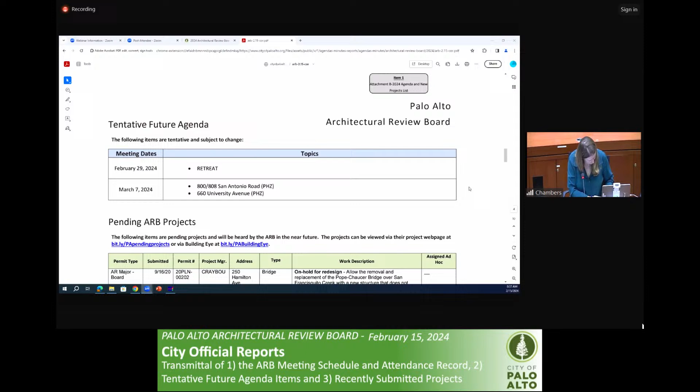Okay, moving on to the next item, city official reports. Staff: just a couple upcoming items. Board Member Rosenberg will be absent on 3/7, and Chair Baltay will be absent on 3/21. And so if you do plan to be absent, please let me know, we want to make sure we have a quorum for these upcoming items.

As you guys know, we have an upcoming retreat on February 29th. We are planning to start at 9 a.m. that day and expecting it to go until about 1 o'clock. We have a number of items planned as part of that retreat, including some trainings from our attorney's office and a few other items. We will bring in lunch that day for you guys. The meeting will be in the community meeting room, the glass room on the ground floor of City Hall.

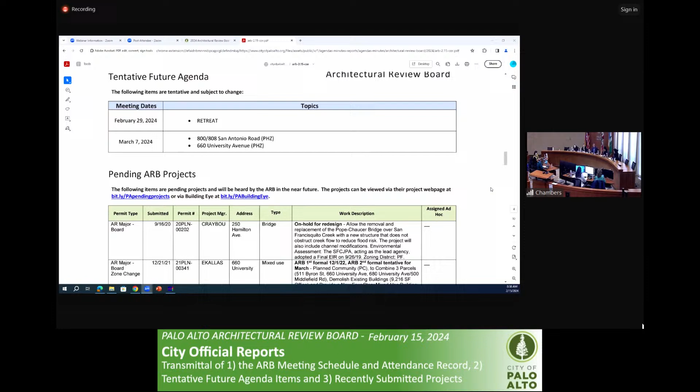And upcoming items for March 7th: we have two tentative housing projects, but it's possible one of those will move out to the 3/21. That's why I'm thinking it would be a good time for the ad hoc to report out instead of one of those projects, if we can. And then there are new projects that were filed. Let's see.

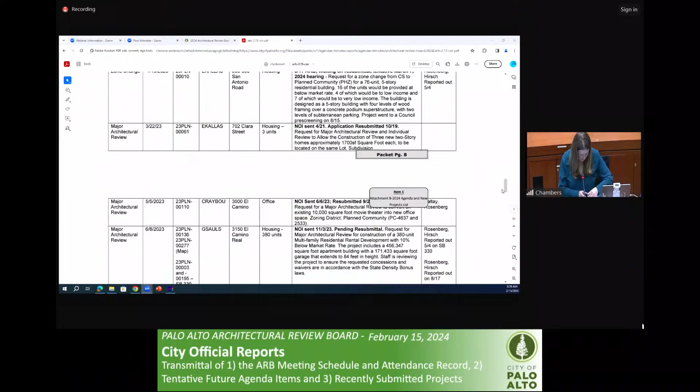Apologies to interject here, Claire. I just got notification that I will not be missing the 3-7, so I will be here for that one. Great, okay, perfect, thank you.

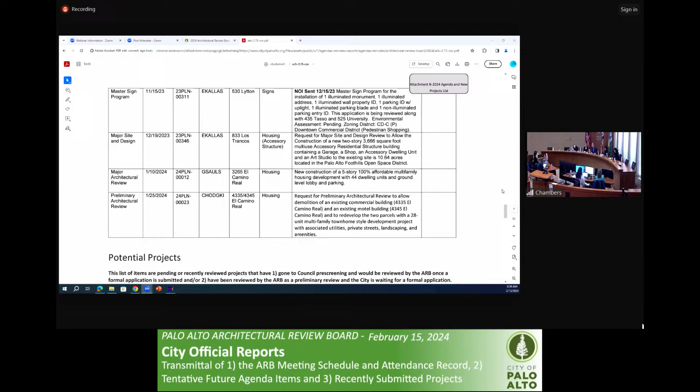Apologies, speed of light. So we do have one new preliminary review item. This is a new townhome development project at 4335 and 4345 El Camino Real, basically right on the border of Mountain View and El Camino Real. They're proposing to redevelop the two parcels with a 28-unit multifamily townhome style. This is a Summerhill Homes project.

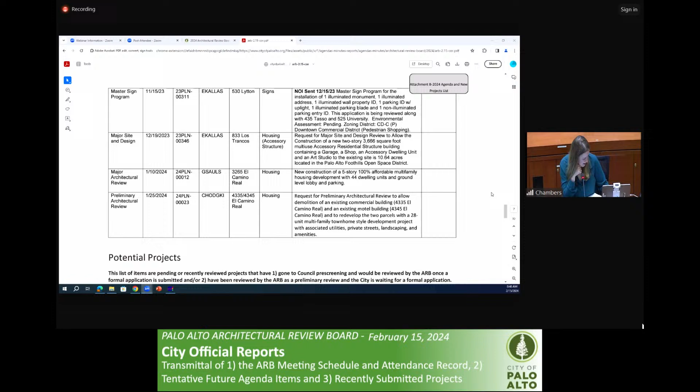I think that's the only new project. We are expecting, I just want to give you a heads up, Buena Vista Mobile Home is going to be coming in this week, filing a formal application, so you'll expect to see that on the next agenda. We are planning on taking that to an early hearing with council to get some early preliminary feedback, because there are components that will bring that project forward to council, including a regulatory agreement and other aspects of the project.

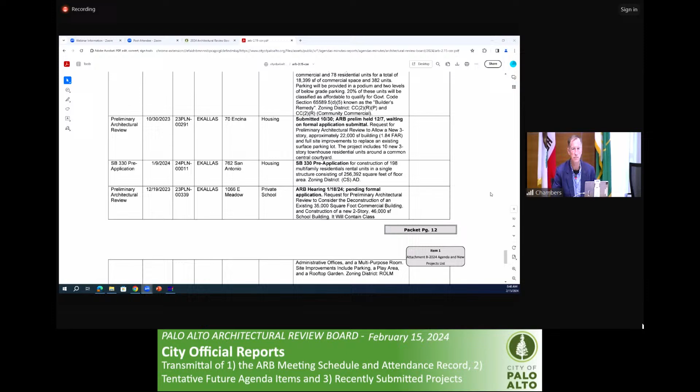I've read about it in the paper, but could you tell us what the scope of the project is, roughly speaking? I know it's not been formally submitted, but informally, they plan to split the lot. They will have a 44-unit mobile home project that gets processed through HCD, and there will be a 61-unit apartment project that's 100% affordable that will be processed through the city. So a total of 105 units.

How many mobile homes are there now? Do you know? I'm sorry to ask you these questions, but I believe, just trying to understand the intensity of this. I believe it's around 80 or so right now.

Okay, good. So I will want to assign an ad hoc committee to that. I guess when it comes in, we'll do that, so maybe at the next meeting. And I would like to assign an ad hoc committee to this project on El Camino Real.

Seems like it's 28 units of new housing, so I'd like to get two of us again, just tracking that project. Before we do that, I'd like to report to the board that I assigned, refresh my memory Claire, board member Rosenberg to the ad hoc committee for the school at 1066 East Meadow. And board member Adcock as well, I believe. I haven't had a chance to ask formally, but, that's embarrassing, we'd like to ask if you could be on the ad hoc committee for the 1066 East Meadow project. Okay, yes, count me in.

Thank you. We did have a discussion that week. This came in as a preliminary review, and they don't have a formal project on file yet. So the ad hoc committee would be available to meet with staff and the applicant if they want to bounce some ideas on the redesign off of us, and to give some early feedback. We'll make sure that we track everything that is being said so that it can be disclosed in that first hearing, presuming they come back with a formal application.

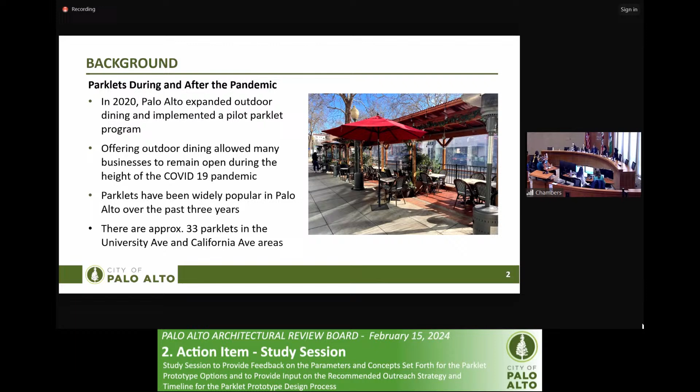As many of us know, the city expanded outdoor dining opportunities in 2020 in response to the COVID-19 pandemic and implemented a pilot parklet program in the University Avenue downtown and California Avenue Business District. The program allowed many businesses to remain open throughout that time and has been widely popular by both businesses and residents.

At this time, there are approximately 33 parklets. Actually, I have an updated number following a site visit recently. There's about 27 parklets currently constructed in Palo Alto.

As I mentioned, 2020 was the start of the program. In 2021, council directed staff to develop a permanent parklet program with input from the Architectural Review Board. And a quick note on terminology: the permanent program, the word 'permanent' is really used to distinguish between the pilot program standards and the permanent program standards, but parklets themselves are not necessarily permanent, and they're intended to be designed to be removed if needed.

Throughout 2021 and 2023, staff worked with the ARB and returned to council numerous times to receive direction on program elements, including fire safety, the use of heaters, parklet size, and letters of consent. As Ashwini mentioned, on September 11th in 2023, council adopted the permanent program standards and fees and directed staff to work with the ARB to create pre-approved parklet designs. The full history of the parklet program is available in attachment B if needed.

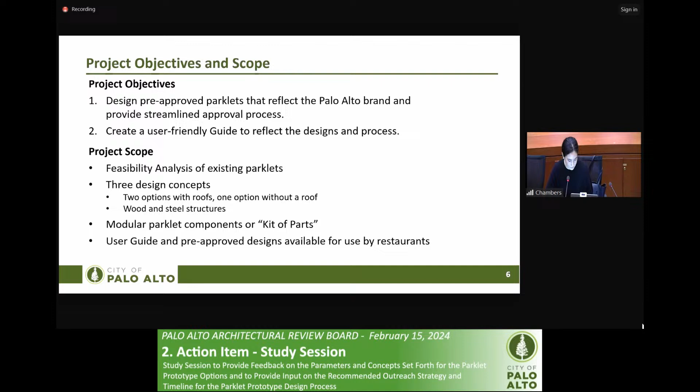Each prototype concept will include a kit of parts, including modular designs for each component: a platform, the flooring, the enclosure, sidewalls, and the posts and roof. There may be some repetition in components across the 3 concepts, but the concepts emphasize that there are multiple roof options and a no-roof option.

Upon initial discussions with the consultant architects and engineers, the recommendation is for the platform to only be available in a light gauge steel option, for wear and tear and durability, to allow these to sustain multiple years in weather.

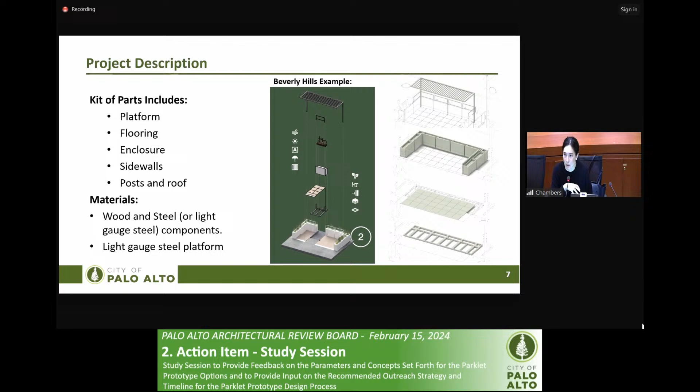The guide itself—actually, let me go back a minute. In council's direction in September, the Beverly Hills parklet example was mentioned, and that's the inspiration for this project. On this page, you can see some excerpts from their design guide showing the modular concept and their kit of parts designed and compiled together.

In the next slide, there's an example from the Beverly Hills guide showing what a page might look like in the user guide itself, outlining the component: a description of the section, a diagram of what the parklet might look like with that component, the required standards, optional standards, and the kit of parts. The part at the bottom shows the variation of designs for a planter in the Beverly Hills example.

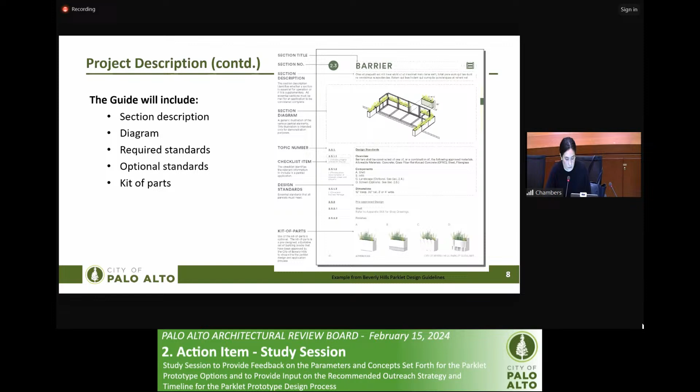There are a number of stakeholders for this project, including the Architectural Review Board, property owners, business owners, the Palo Alto community, restaurateurs, and city council.

Throughout the process and the development of the prototypes, we plan to seek input from the ARB and business stakeholders. This slide highlights the outreach timeline—I'm going to jump ahead to the next slide, which has the overall timeline, including the outreach timeline.

The timeline starts today with receiving initial feedback and ideas on the parklet concepts from members of the ARB, followed by an ARB ad hoc meeting, should you choose to create one, to review draft parklet components, designs, and materials, followed by a meeting with businesses and stakeholders in the community to receive feedback on those draft concepts. In May, we plan to return to the ARB with draft prototypes and the draft guide to receive a final round of feedback before finalizing the prototypes and guide and returning to council in June.

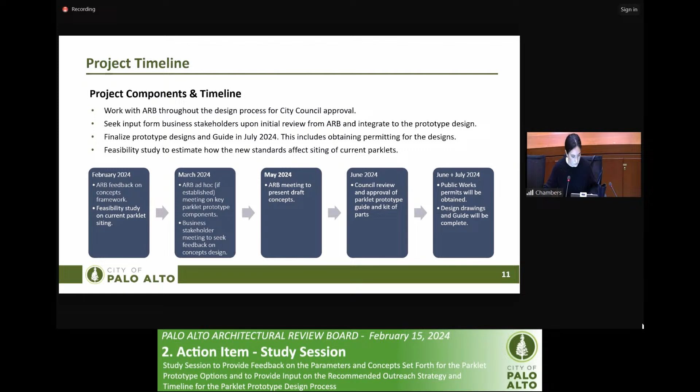As mentioned, there were numerous changes between the permanent program and the pilot program, including standards, changes to setbacks, drainage requirements, the enclosure, and size of parklets. As a result, it's expected that nearly all existing parklets will require some level of modification to comply with the permanent standards.

As part of the kickoff of this project, we have conducted a feasibility study on the current parklet siting to estimate how many parklets, if any, would not be feasible based on the new setback standards. That will help inform whether the city needs to revisit any standards.

Some other considerations as we embark on this project are heaters. Propane heaters are permitted under the permanent program with a hazmat permit, and the requirements of the hazmat permit may ultimately decide if a restaurant can use them.

Requirements for a hazmat permit include that heaters cannot be used under roofs, canopies, or tents. They must be a minimum of 5 feet away from any flammable materials, and cannot be stored indoors or in the public right of way. The standards are fleshed out further in Table 1 of the staff report.

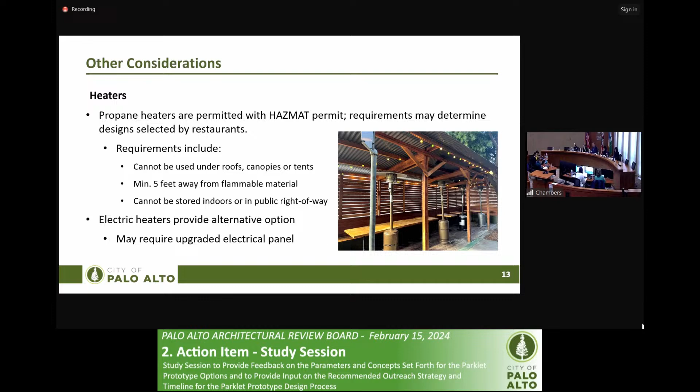Here are some questions we're seeking your input on. First, feedback on the overall proposed approach or anything you'd like us to take into consideration. Are there any materials or examples you'd like us to look at specifically? This relates to all of the components—the enclosure, flooring, roof, structure, and sidewalls. Also, do you have any feedback on the stakeholder outreach, the universe of stakeholders, as well as the strategy and timeline? We look forward to your feedback, and if we could get direction on a potential ad hoc, that would be great.

Anyway, I really urge your attention and consideration of creating a real sense of place in this very special location. Again, lighting, colors, materials. It's not just another location on Middlefield Road or even on University Avenue. It's a very special place, and let's make it special. Let's take advantage of the resources and possibilities that exist.

It may be that you want to send it to the HRB for consideration, but I think you all are capable of coming up with some really sensitive design criteria for that very special place. Thank you so much for listening.

Thank you very much. Anyone else, please? No, just the one. Thank you. We'll bring it back to the board then. We were going to go through a round of questions.

Board Member Rosenberg, go ahead. Thank you, and I appreciate your presentation—that was extremely informative. A couple of questions, I guess, about the process. So in comparison to the Beverly Hills outline you guys had shown as an example, how far along are you with preparing that document? What stage are you at?

We're at the very beginning. Okay, not a problem. I just wanted to see if there was actual documentation that you had for us to review, or if we're really just getting into the start of it. We're just getting started, and we wanted to get your feedback to help us kick things off.

Excellent. And then my second question is about the people who already have parklets—the ones hit hard during COVID, who had to clamber these things together at the last minute. A lot of people have put a lot of time, attention, effort, and money into these. So the question would be, is there going to be a separate path? You touched on it lightly about how to make sure the existing parklets, some up to 4 years old now, can be brought into compliance.

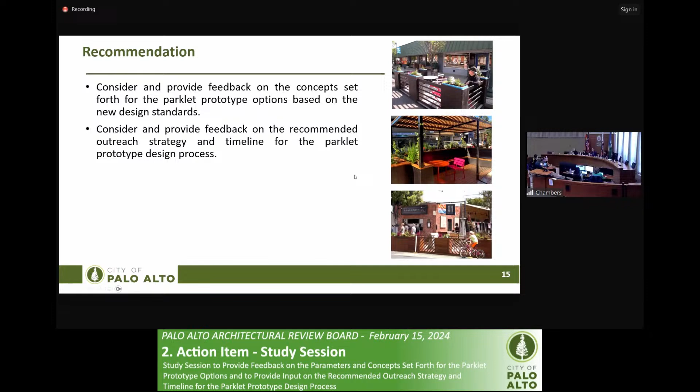Just wondering if we're going to be establishing an ad hoc committee with it? Yes, I think we will. I just want to—okay, so...

Well, we haven't discussed an outreach strategy—is that something you want our input on? We thought it's pretty comprehensive; what we want to make sure is we stay connected with all of the restaurateurs, business owners, property owners. We actually have a meeting scheduled next week, where we'll have an opportunity for them to understand how we're going to approach this and how it's going to benefit them. But if you have any input from us on the stakeholders themselves, or on the timeline, we'd welcome that. Thank you.

I'll comment—the three photos you have of presumably parklets you think are attractive or desirable, right? All have planters with plants in them.

It's funny, but it's actually not. These are really important.

Okay, let's form an ad hoc committee. Who wants to take this on? I am interested in doing this. Who wants to join me on this committee?

Kendra? I would love to. Thank you. I just don't want to steal it from somebody else if they're interested. I'd like to do this. I intend to actually speak to merchants myself, not part of your formal outreach, but informally. I dine out a lot around town and I really am interested to hear what they think. A lot of what I'm saying comes from conversations I've had.

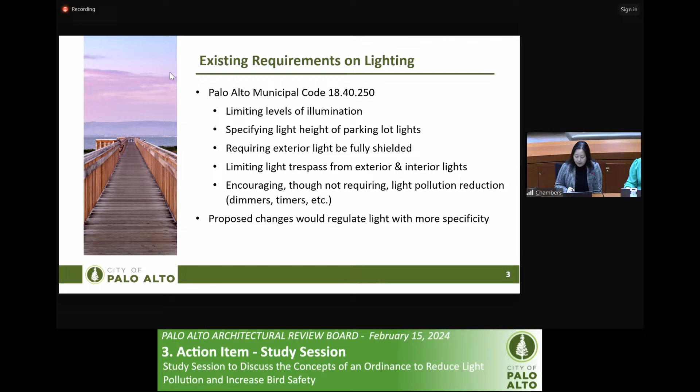Adding on to what we have in our code, staff is recommending some new requirements related to dark sky. Those are timing or curfew. Staff is considering requiring businesses, not necessarily homeowners, to turn off their lighting 2 hours after business closure or 10 p.m., whichever is later, and also requiring motion sensor devices for lighting after the curfew, with exceptions for emergency uses like healthcare facilities and some landscaping lighting.

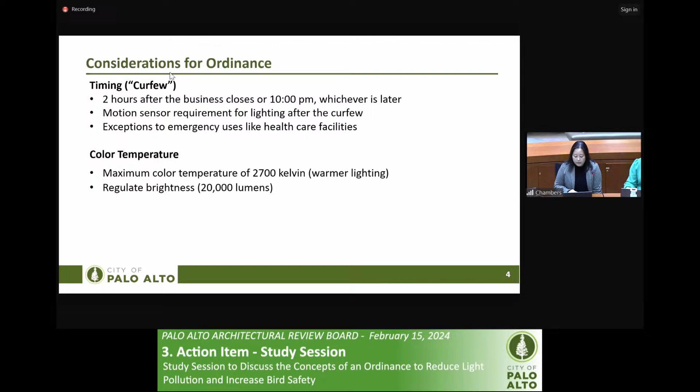Next, please. Palo Alto already has a requirement for shielding, so we're continuing that, but staff is also considering reducing the light trespass requirement from 0.5 foot candles to 0.1 foot candle when adjacent to residential. There are also some special purpose lighting categories: security lighting, outdoor recreational facilities lighting, service station lighting, and string lighting. Those are some of the things we're considering, mostly continuing the same pattern of regulating brightness and timing or curfew, but with some specific considerations related to the uses and purpose.

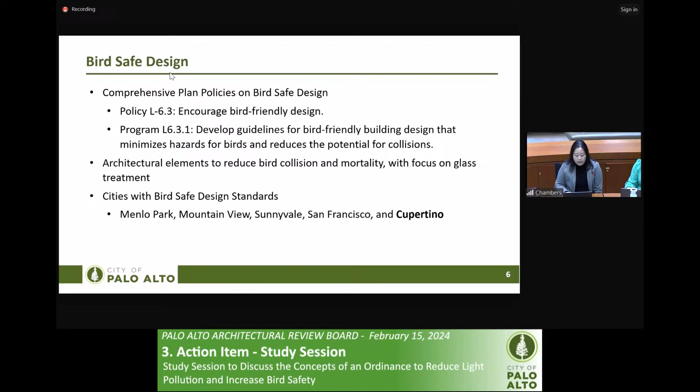Next, please. The bird safe design. As I mentioned, there's a comprehensive plan policy encouraging bird-friendly design and developing guidelines for it. After reviewing neighboring cities like Menlo Park, Mountain View, Sunnyvale, San Francisco, and Cupertino, staff is currently considering design standards specific to glass treatment. The current approach is largely based on Cupertino's ordinance.

Next, please. So staff found, comparing all of those ordinances, that there were common standards: no more than 10% untreated glazing between ground level and 60 feet above ground.

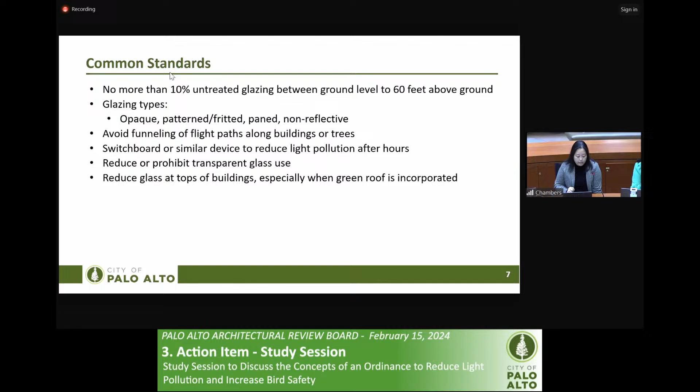And there were some specific glazing types listed and requirements on avoiding funneling of flight paths and switchboard requirements after hours, reduction or prohibition of transparent glass use, and also reducing glass use at the top of the building, especially when it has a green roof on top.

Next, please. These are some of the other standards staff found from other city ordinances. These are not as common, mostly found in San Francisco and Sunnyvale. Currently staff is not considering these for Palo Alto, but they're presented here for ARB's information.

San Francisco has a distance and location requirement: 300 feet from open space or open water, green rooftop 2 acres or greater. The standards only apply to those buildings. For Sunnyvale, it applies to all buildings, but they have more stringent requirements if located within 300 feet of open water or a water body, or immediately adjacent to green spaces.

For Sunnyvale, there are reflective level requirements specific and more stringent for those located 300 feet or immediately next to open water or green space, and also a requirement for architectural elements.

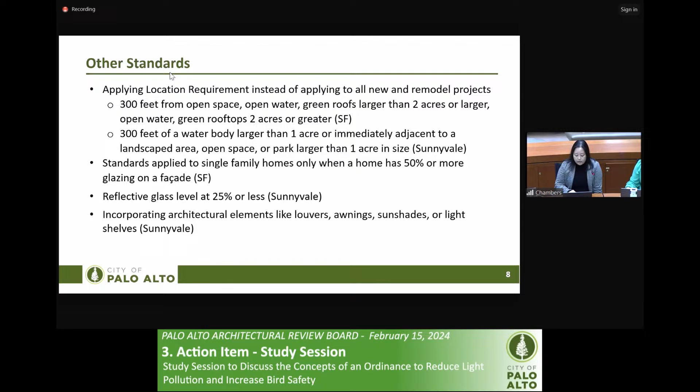Another thing I wanted to point out was that San Francisco had a specific rule where they only apply these bird-safe design standards to single family homes when that particular home has 50% or more glazing on a facade. So I thought that might be something ARB wanted to consider. Those are some of the findings for bird safe design.

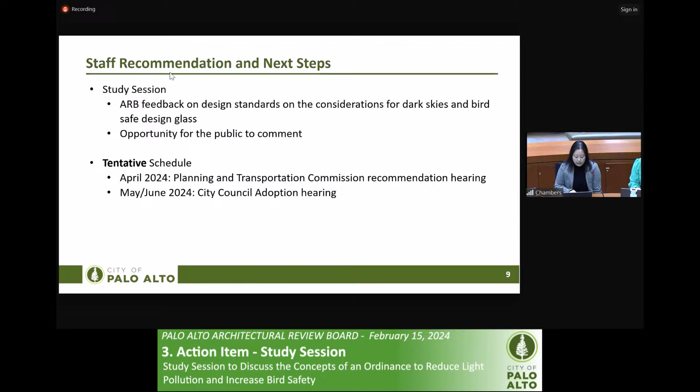Next, please. This is a study session item, so no action is required from the ARB, but staff is seeking ARB's feedback and input on staff considerations for dark skies and bird safe design. We're also providing an opportunity for public comment on this item. Staff will take the ARB's feedback and develop draft ordinances for both topics, presenting them to the Planning and Transportation Commission in April and to City Council for adoption in May or June of this year. This concludes staff presentation, and I'm ready to answer any questions and collect feedback.

Thank you very much. Why don't we open to public comment next? Do we have any members of the public who wish to address us? Yes, one from Shani Kleinhaus.

Good morning. If you could please state and spell your name for the record. My name is Shani Kleinhaus. I am a resident of Palo Alto. I'm on the Parks and Rec Commission, but I do not speak for Parks and Rec. Today I represent the Sierra Club and Santa Clara Valley Audubon Society. So if I go a little over time, hopefully you'll let me, since I'm speaking for more than one organization.

The Sierra Club and Audubon worked a lot with staff. We actually developed a model ordinance for dark sky, or for light pollution, because light pollution affects things that are not only in the sky. We provided that to staff and also included it in a letter that we sent to you yesterday.

I would like to talk about a few general scientific things. A new report just came out this week from the UN showing that one-fifth of all migratory species are at risk of extinction, and half of migratory species worldwide are suffering population declines. We in this area are on the Pacific Flyway, which is a really critical place for birds and other migratory species.